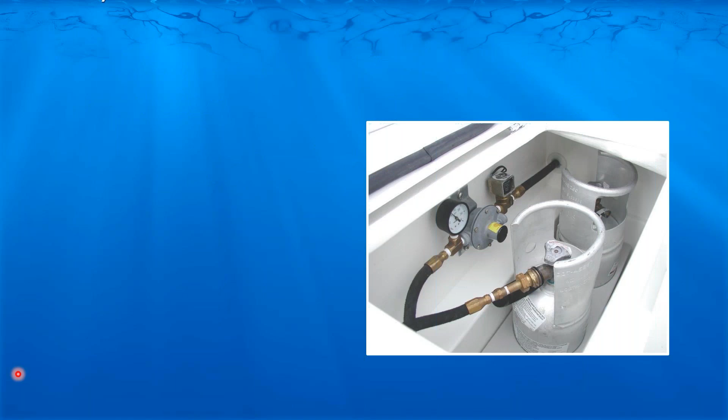All right, so we're looking at a fairly typical installation on what appears to be a pre-made section of a locker intended specifically for the purposes of being a propane locker. And we'll talk specifically about what makes that so, what we need to do in order to have a dedicated locker for our propane system. But in order to have a proper setup, we'll run through these quickly, and then we're going to look at each of them specifically as to their intentions.

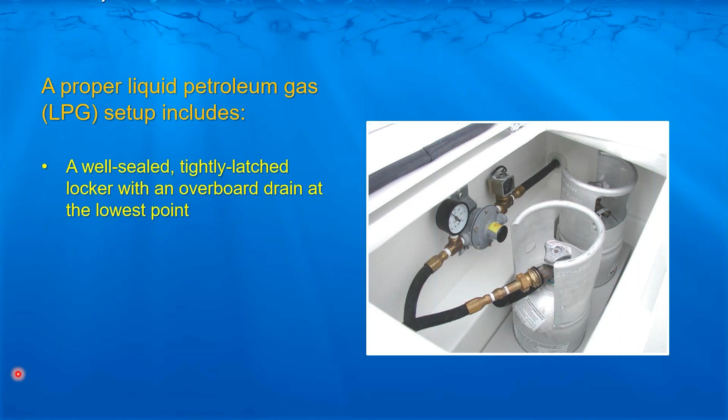Number one, we have to have a very well sealed, tightly latched locker that has an overboard drain. It's a vapor drain, not meant to be a liquid drain, although it will drain liquid if for some reason liquid was to get into that locker. But that is there to drain off any possibly leaked liquid or propane gas that would come out of the system inside the locker. And that drain has to be at the lowest point, of course.

Got to have a pressure regulator, which is this component right here. You have to have a pressure gauge. Pressure gauge is required by ABYC in a liquid propane gas system. You have to have a shutoff valve. In some cases, the valve on the tank suffices. Otherwise, you will need a remotely operated solenoid shutoff valve in the system.

The one big stipulation is that all supply lines between your locker, between the tanks, and whatever components are running off of propane, all of those lines have to originate inside the locker. We do not want lines taken out of the locker and teed off of to feed multiple components. If you need to do that, all of those tees need to be made inside the locker. We want to eliminate the possibility of as many leaks as possible and eliminate all connections as possible outside that locker.

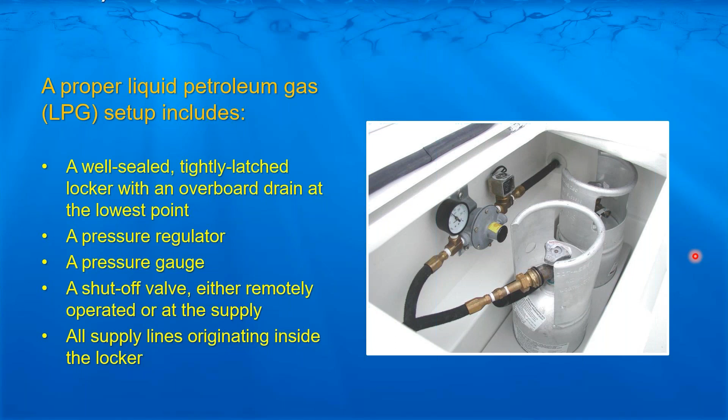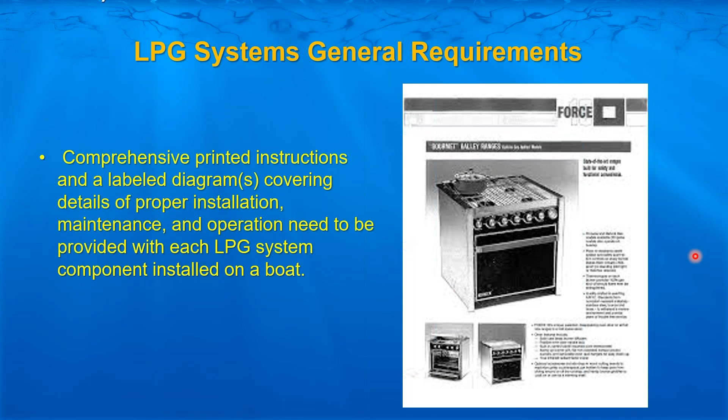It's also required to have a comprehensive instruction book, information supplied with the system, supplied with any components that are installed. That is a standards requirement that information's got to be supplied to the owner or to the boat operator. And we'll look at this specific test later. Those instructions have to state that a test is to be made every time the cylinder supply valve is open for use and after any events that may affect that system.

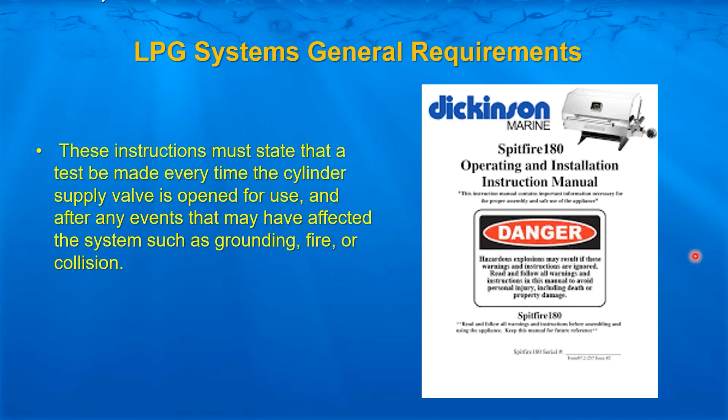We all know that very few people are going to do this, but they have to be provided with that information and understand that that is supposed to be done. Again, we are in a very high liability oriented world, and you're dealing with the possibility of a high liability system. So everybody has to make sure that they cover their butt as far as what should be done. Not that the end user is necessarily going to adhere to that every time.

So we talked about the fact that every system has to be fitted with a pressure gauge, and this is a fairly common setup with the gauge connected to the regulator itself.

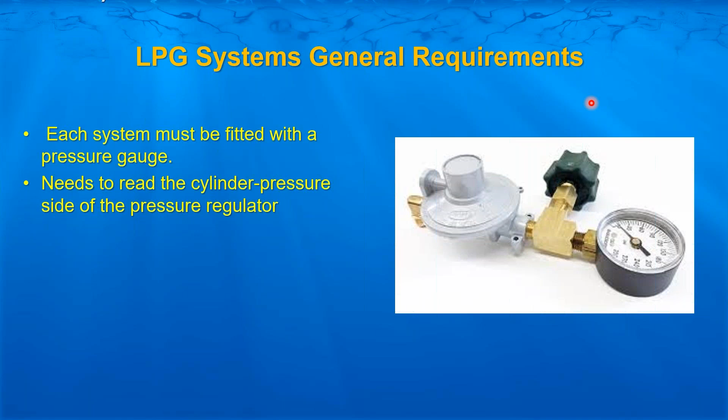That gauge is there to read the cylinder pressure side of the pressure regulator, the high pressure side. The reason it's there is to provide a very easy way to perform a simple test to make sure that the system does not have any leaks, and we'll talk about the specifics of that test a little bit later too.

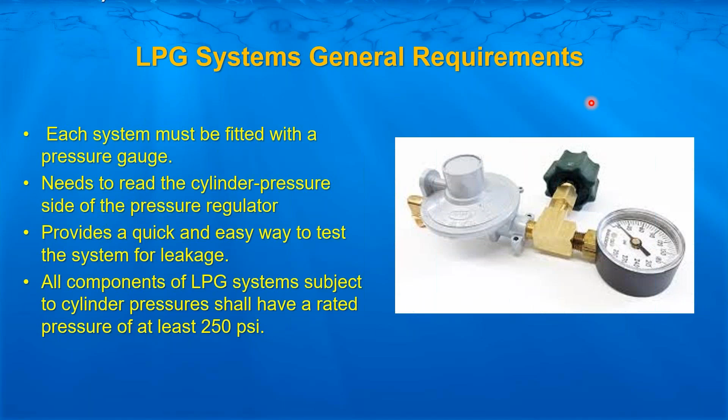You don't see it too much anymore. It has fairly well fallen out of favor. It has to be stored in very large, heavy tanks. It was not very efficient. Didn't last very long. So liquid propane really has taken over as the main player in this genre, this scenario of using gas as a power source.

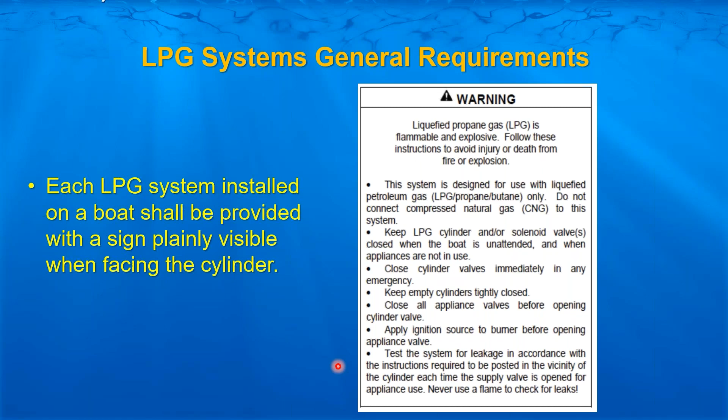On gasoline-powered boats, that sign also has to contain this information, that gasoline vapors are explosive and any open flame appliances can ignite those gasoline vapors, causing death or injury. What that means basically is you don't want anybody operating the stove while you're refueling the boat if you have a gasoline powered boat.

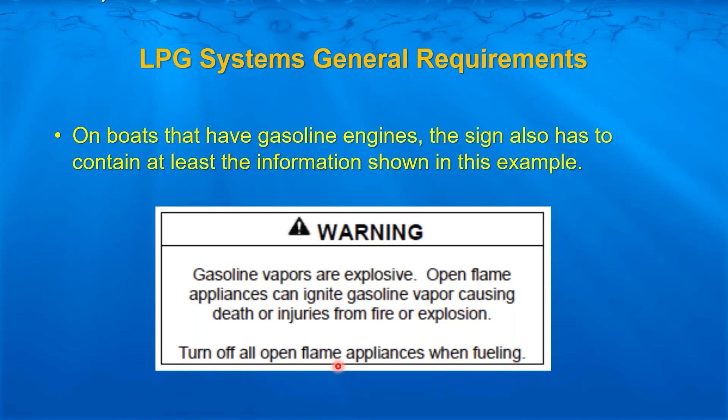All the system components have to be able to operate in an ambient temperature range between 0 and 140 degrees Fahrenheit. And again, if you're using properly rated, usually marine rated appliances and components, they should all fairly standardly meet that and all of these requirements.

Only systems using LPG cylinders of the vapor withdrawal type are permitted. Cylinders that can admit liquefied gas into any part of the system are prohibited. Again, we're not trying to transport or transfer liquefied petroleum gas from one point to another. The only thing we want to admit into that system is the gas at lower pressure.

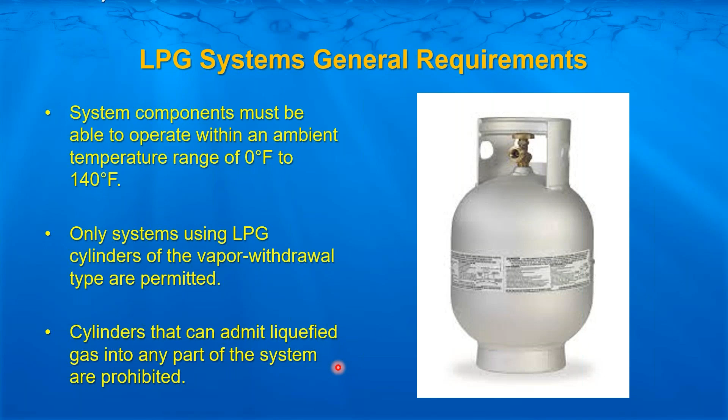There's a couple of Rube Goldberg setups for you there. Components in that system need to be secured properly. We don't want them to move around, mainly because that could put strain on the distribution system, our fuel lines, the propane fuel lines. So needless to say, neither of these scenarios is even remotely proper.

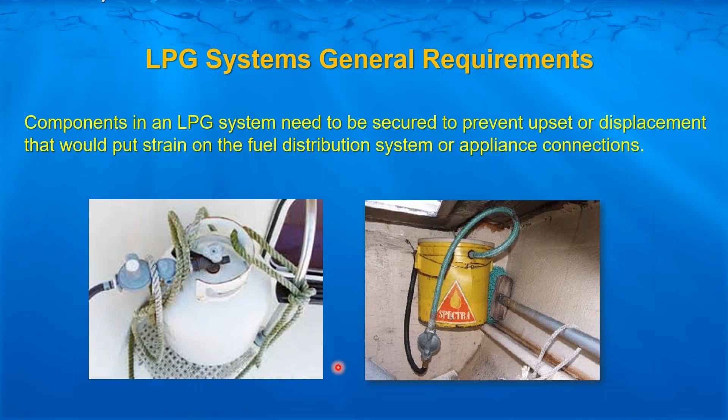Ignition protected equipment. Any of you who have been in the electrical classes understand, when we're dealing with gasoline and in this case propane, anything electrical in the vicinity of those systems has got to be rated to be ignition protected. In this case, for liquid propane, it's required in any compartment containing our liquid propane appliances, cylinders, fittings, valves, or regulators. Now, in most cases, that is just going to be inside the locker. All electrical equipment capable of being a source of ignition needs to be ignition protected and so marked. If it does not say ignition protected on it, do not assume it is ignition protected.

There can be no open flame devices around electrical equipment that's not ignition protected, and around our propane system components, no open flame devices. There can be no exhaust pipes or heat producing devices capable of producing a temperature in excess of 300 degrees Fahrenheit near the components of our LPG system.

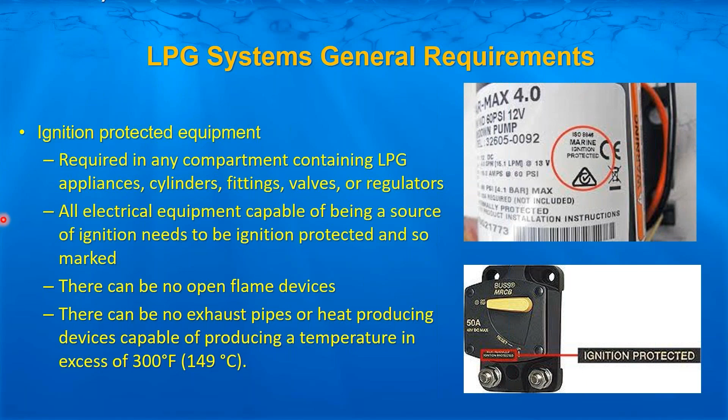Electrical devices in the following compartments do not have to be ignition protected: anything that's in the accommodation space or compartments meeting the definition of open to the atmosphere. That is defined by ABYC as a space having at least 15 square inches of open area per cubic foot of compartment volume exposed to the atmosphere outside the vessel. That is a very specific definition per ABYC that constitutes a compartment that meets that open to the atmosphere declaration.

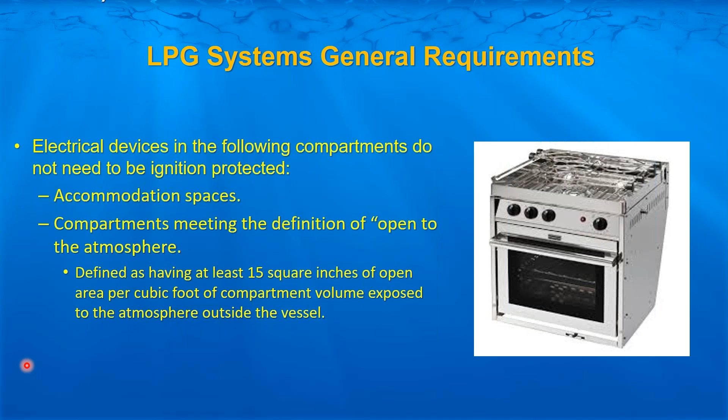But anything that's in an accommodation space, a stove, a heater, whatever else it might be that's running off of propane, if it's in an accommodation space, it in and of itself is not required to be ignition protected. All the cylinders that are used have to be DOT compliant. You should have a DOT number on them, no matter what they're made out

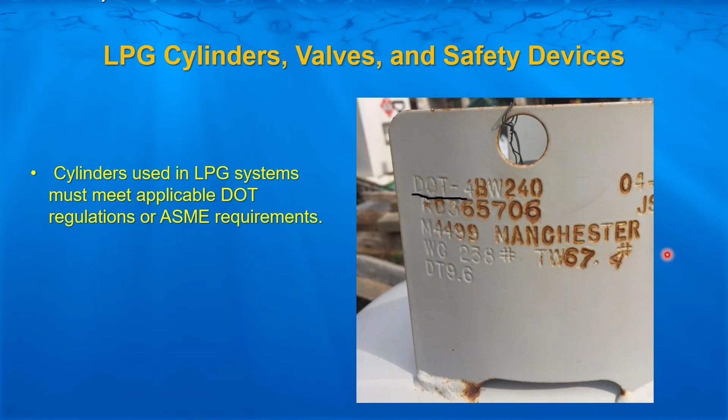of. Every appliance must be fed from a regulated supply line that originates inside the cylinder locker or protective enclosure. So as we discussed, and we'll mention this several times, every connection in the system, except one, which we will see in a minute, is required to be inside this locker. We do not want any joints and connections made outside of that propane locker.

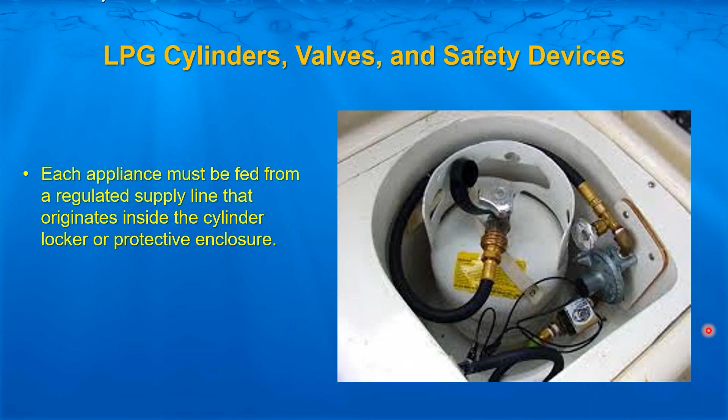There's a requirement to have a readily accessible, either manual or electrically operated shutoff valve installed in the low or high pressure line at the fuel supply. So it's required to have a manual shutoff on the cylinder. And if you have remote appliances, you have to have a solenoid valve, an electrically operated valve in the fuel line. Now it can be before or after the regulator. The regulator is there to reduce the pressure coming out of the tank.

The only thing you have to watch is to make sure you get the properly rated solenoid valve. I have seen installations where somebody puts a low pressure solenoid valve in between the tank and the regulator. It is not going to shut the gas off when you turn the breaker off, turn the switch off. So it is allowed to be on either side of the regulator. Just make sure it is rated either for the high pressure side or the low pressure side.

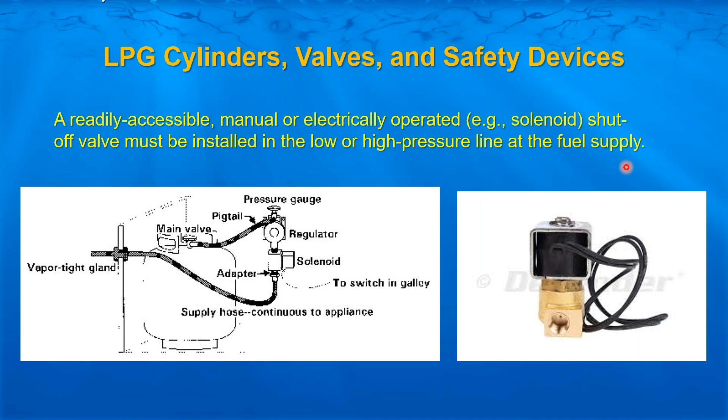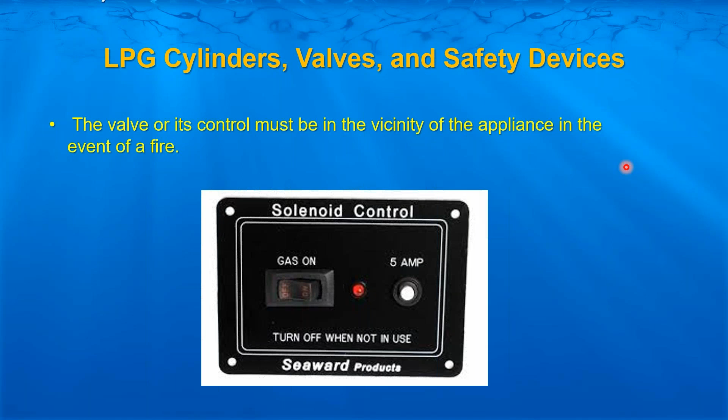The valve or its control must be in the vicinity of the appliance that's being fed in the event of a fire. Fairly typical panel there. If the cylinder shutoff valve is readily accessible from the vicinity of the appliance, the shutoff valve on the supply line is not required. So if the only thing you're feeding with propane is a barbecue on the aft deck or wherever it might be outside, as long as that tank shutoff valve is within a step, readily accessible from the vicinity of that appliance, you don't have to have an electrical shutoff like a solenoid.

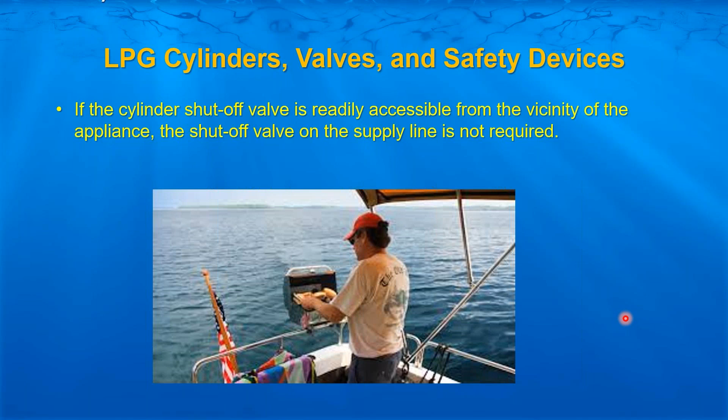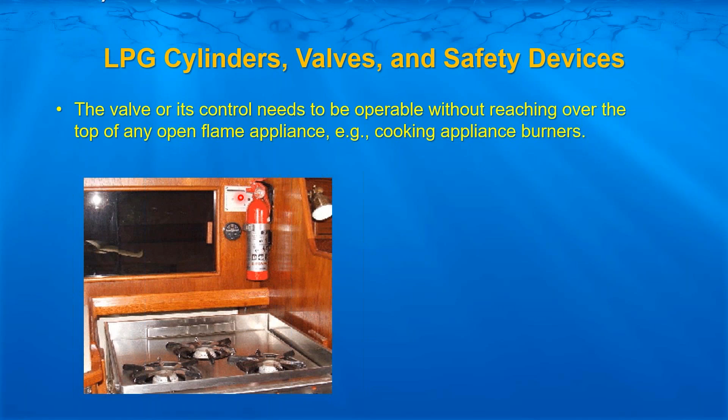The valve or its control needs to be operable without reaching over the top of any flame. Open flamed appliances, mainly cooking appliance burners. What do you think about the location? This is our shutoff for the solenoid. This is our fire extinguisher. How about now? Not a good place for either one of those. So there's actually a standard requirement that that shutoff has got to be operable without reaching over those burners.

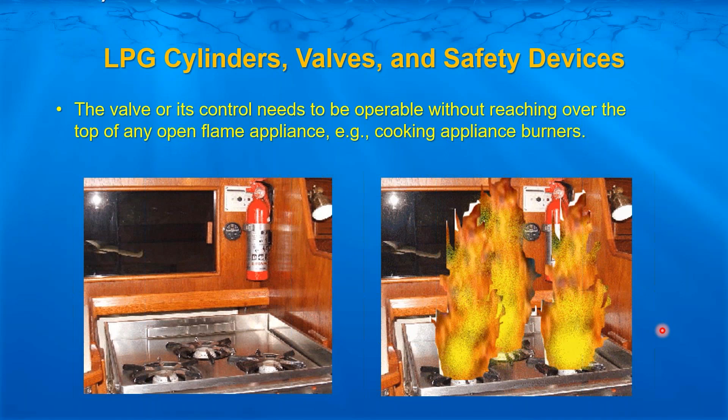In addition to the valve required at the cylinder, if you have a multiple cylinder system, it has to be provided with a shutoff valve or automatic check valve at the cylinder manifold so that each cylinder can be isolated from the other cylinders. Fairly typical. You can buy this assembly as is for a 2-cylinder system.

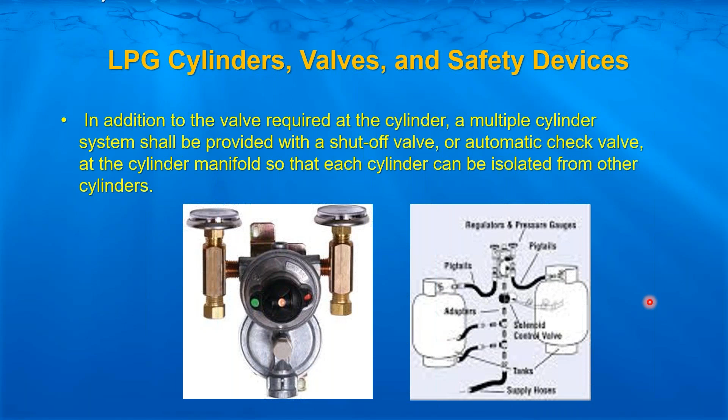Our pressure regulators: every system has got to have a pressure regulator. The pressure coming out of that propane tank is way too high to be used without a regulator, just like you have on your grill at home. It's got a pressure regulator on it. That's what that little round silver thing is, to reduce the pressure coming out of the cylinder.

These regulators have to be specifically designed for use with liquid propane. And they have to be rated to deliver gas under whatever varying appliance loads there are at a pressure not in excess of 14 inches of water column. Water column is a specific measurement of pressure. So 14 inches of water column is the maximum pressure that the gas can be delivered after the regulator.

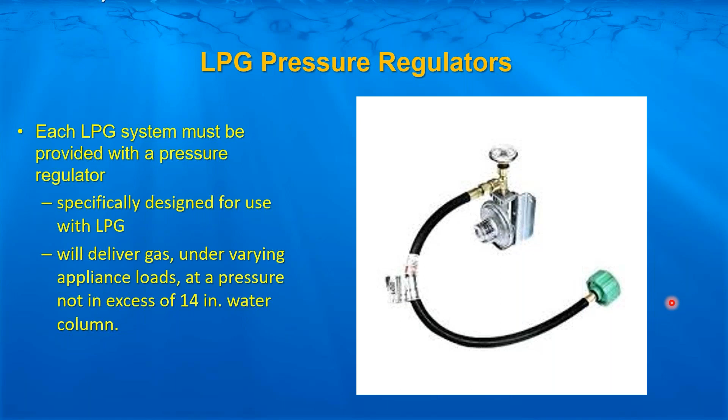It's a picture of a fairly typical regulator, although you don't see too many that actually have this little hose barb connected, and we'll discuss that; this is the relief device. The pressure regulator is required to have a low side pressure relief device integral with the regulator. And we'll see another one of these where it's a little bit different, but this is the pressure relief on the low side, the regulated side of the regulator.

The requirement for that pressure relief is that it will discharge between 2 and 3 times the delivery pressure of the regulator. And again, if you're buying properly marine rated components, they should automatically meet these requirements.

All relief valve outlets shall discharge into the dedicated locker or to the open atmosphere outside the boat. You don't normally see these with an actual hose barb on them where you could vent this out specifically by itself. Normally, it will vent into the locker and then go out the vapor drain that is there to drain off any leaked vapor inside of that locker.

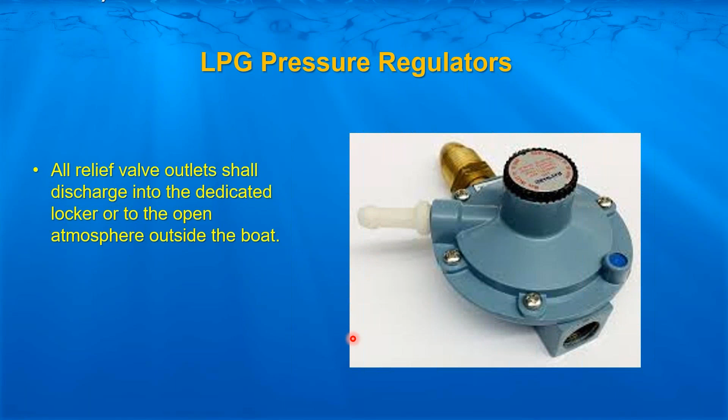Now, if you had a pressure regulator that had that little piece—if you wanted to run a piece of hose from this relief valve discharge through a gland, an airtight gland, through the locker and to a vent fitting on the side of the boat, you're more than welcome to do that too. Seems like a lot of effort to go through, one more hole in the locker you've got to seal up, when allowing it to vent into the locker is perfectly fine. But you can see here, we've got two devices.

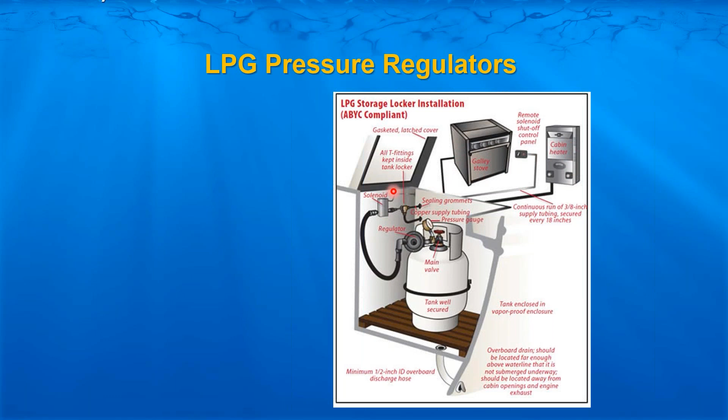There's a little more typical pressure regulator. You can see that little screen there. Again, this is the section that is the relief valve on the low pressure side of that regulator. The regulator is going to reduce the tank pressure to less than 0.5 psi. That goes along with the 14 inches of water column pressure regulation—it's another way to look at it. Another spec is less than 0.5 psi should be the pressure coming out of that regulator.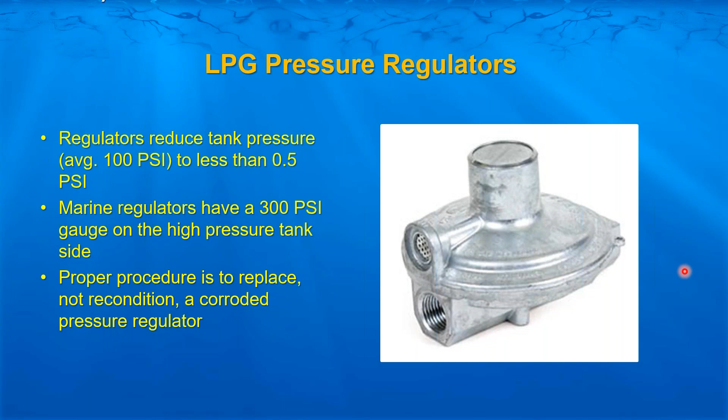Marine regulators have a 300 psi gauge on the high pressure tank side. We already talked about the necessity, the requirement to have that gauge rated to 300 psi. These things are normally made of aluminum, depending on the conditions they're used in—and we'll see where they can be outside, not necessarily in a locker. If you come across one that's extremely corroded, don't try to clean it up, just replace it. That is proper procedure—just replace these things. They're not overly expensive, and it's just not worth the time to try to clean them up.

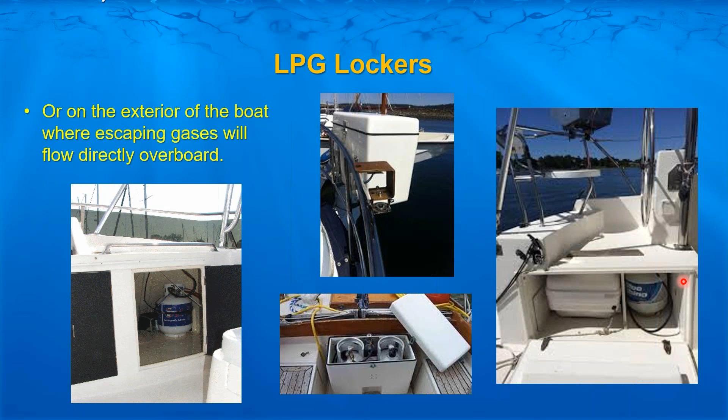All right, the lockers themselves. The requirement is that all of our cylinders are required to be installed in a dedicated locker, or they can be installed on the exterior of the boat where any escaping gases will flow directly overboard. Now, this certainly fits that bill. This seems to fit that bill pretty well. This kind of fits that bill.

You've got a scenario where this locker is going to have a drain, it's going to have an opening on the bottom, and you could possibly have an accumulation of liquid propane gas in the well of the cockpit. If your through-hull scupper drains go down below the water line, there's no way for the gas to drain that way. And on a very still day, you could possibly have an accumulation of propane gas down in that locker well.

This is questionable again as well. It's protected, which again is another requirement. You can't have these things out in the weather, even if they are not in a built-in dedicated locker. If they're on the exterior of the boat, they still have to be. The requirement is that they are protected from the weather. Now, this flybridge covering has drains here, which you can't see from this picture, then it's probably okay. Any escaping gas is going to make its way out.

It's going to stay down along the floor and make its way out through any drains that are in that. But you would certainly need to have some sort of opening at this floor level overboard from this contained area where that tank would be.

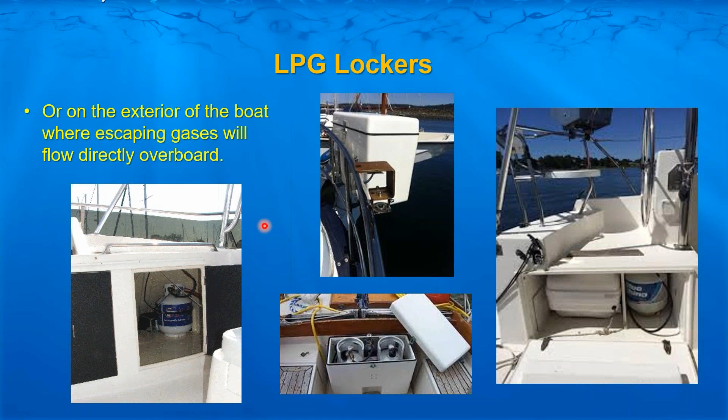Cylinders, valves, regulating equipment, and safety devices are required to be readily accessible, secured for sea conditions, protected from the weather. That is a requirement. Even though you can have propane tanks outside the vessel, mounted outside the vessel, they are not supposed to be out in the weather. They need to be protected from mechanical damage.

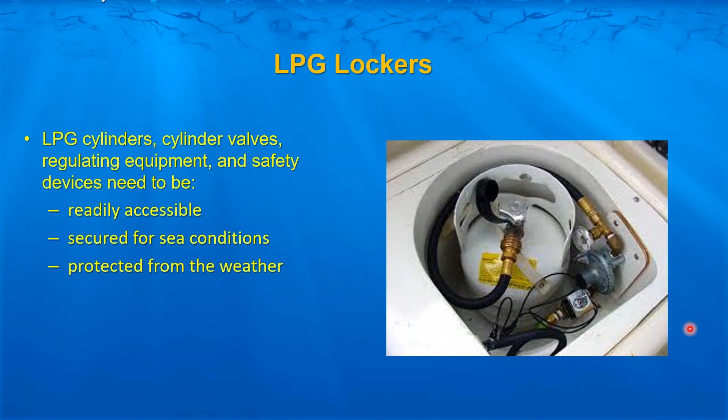The storage requirements for either unconnected reserve cylinders or empty cylinders is exactly the same as cylinders in use. They've got to be inside that dedicated locker. You see a lot of small boats that have rail-mounted propane that takes the little screw-on green canisters, and the green canisters end up in a drawer or in a compartment down below. They do not belong there. If you have any propane on board, it is not to be stored in the cabin, and it's not to be stored in any place where, if it were to leak, gas could make its way into the bilge or into an occupied space.

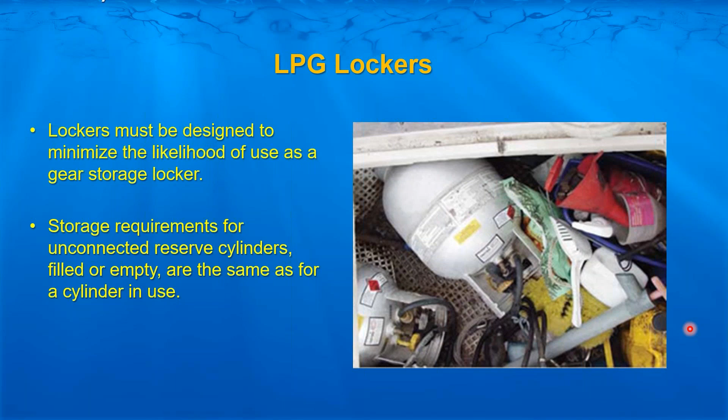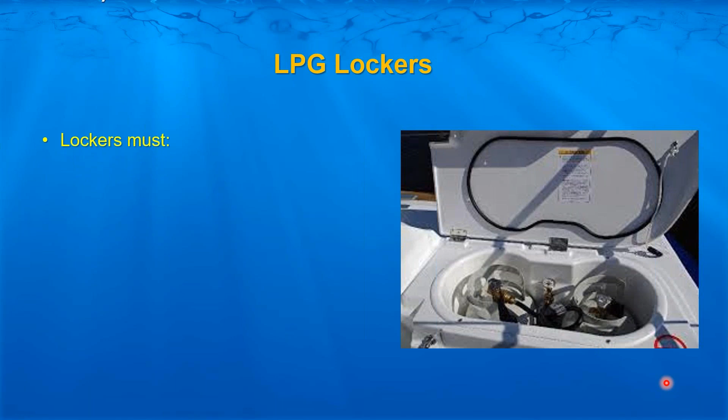The lockers themselves are required to be vapor tight to the hull interior, located above the waterline. That's a very difficult requirement to fulfill when you're retrofitting an aftermarket locker, a locker that goes inside of another locker, and we'll see a picture of that here in just a second. They've got to be constructed of or lined with corrosion-resistant materials.

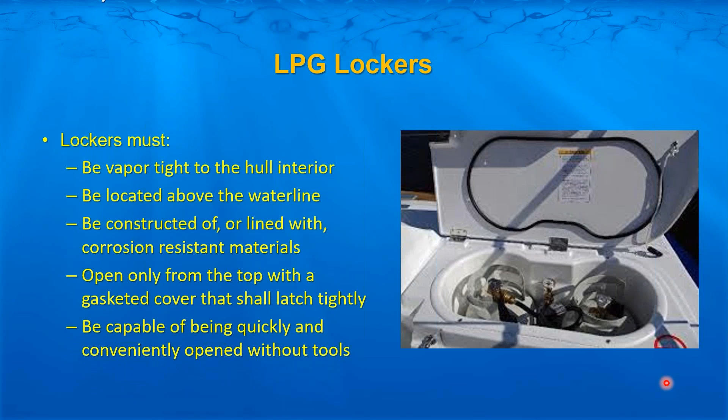They are to open only from the top with a securely latching, gasketed, covered top. They must be capable of being quickly and conveniently opened without tools. The requirement is for a built-in locker that it opens directly to the outside atmosphere. We don't want anything precluding access. We want this thing to be completely open to the atmosphere when the access, whatever that access is, whenever the lid is open.

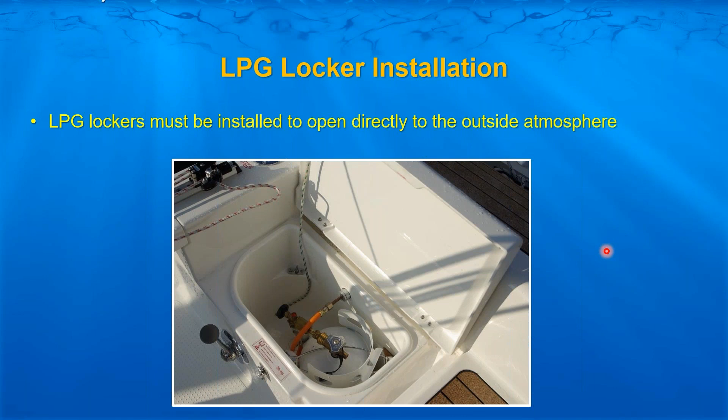There is one of the aftermarket type lockers. If one of these lockers is installed inside a boat locker, inside a lazarette, wherever it might be, the locker is required to be located as high and as close as possible to that boat locker's opening. We don't want this thing stuffed down under this corner over here. It's got to be right out in the open so that when you open the lid to that locker, it is open to the atmosphere, as it would be if this was a built-in scenario.

A lot of older sailboats did not come with a built-in propane locker. People want to install these standalone lockers, and they're very nice—they meet the requirements, the ones that I've dealt with. But in a lot of scenarios, it's difficult to get this in a locker and still have fall from the bottom of the locker to an overboard drain fitting downhill, being above the waterline. That's one of the most difficult parameters to meet when installing one of these lockers on an older vessel.

Most older vessels have a fairly low cockpit, low coaming, and low lazarette or seat lockers relative to the waterline. There's just not a lot of space to get that locker in underneath the lazarette locker lid and still have space between the bottom of the locker and somewhere overboard to run a hose downhill to the overboard fitting.

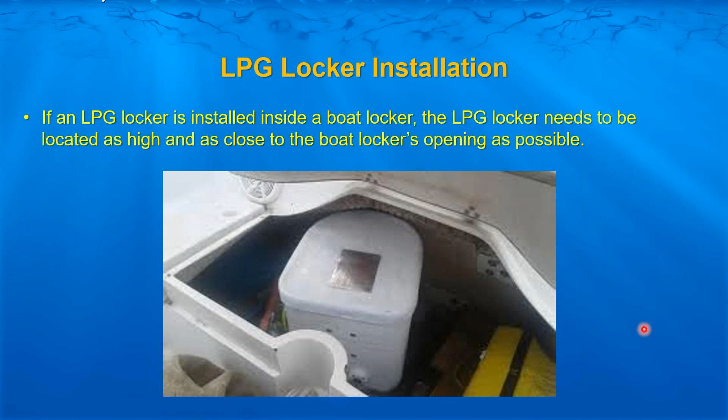Without being below the waterline, which it has to be above. When access to the equipment is needed and the locker's open, the cylinder valves must be capable of being conveniently and quickly operated. System pressure gauge dials need to be fully visible right there—you open that locker, you need to be able to see that gauge.

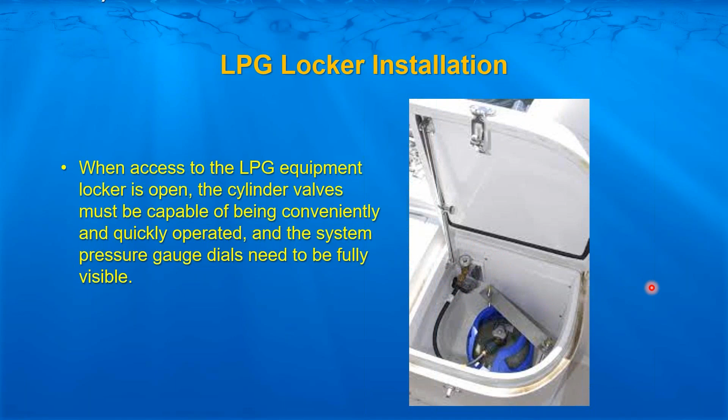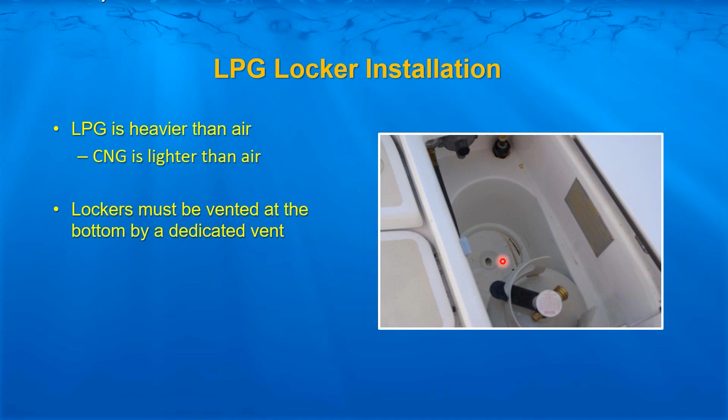As we discussed, liquid propane gas is heavier than air, where CNG is lighter than air. Therefore, we've got to have a vent, a locker drain vent, in the bottommost portion of that locker. That's not there for water—if this thing is gasketed correctly, you're not going to get water in that compartment. It is there to drain off any liquid propane gas that might leak out of the system inside that locker.

Again, the minimum diameter of any component in that drain vent can be no less than half an inch inside diameter. It's not the hose size—it's the minimum diameter of any component in that vent system, which would be the fittings. It's 3/4 inch hose most of the time.

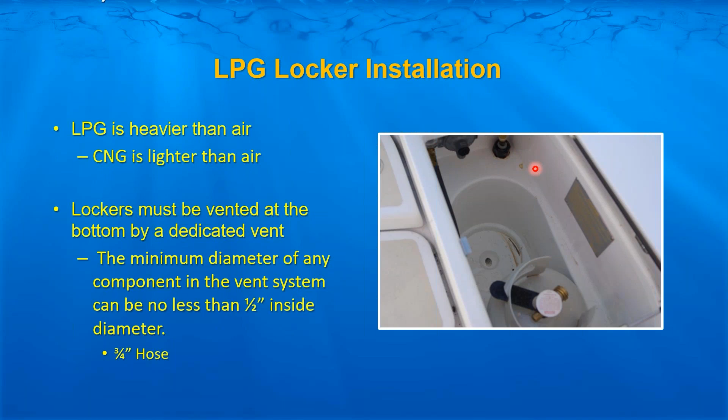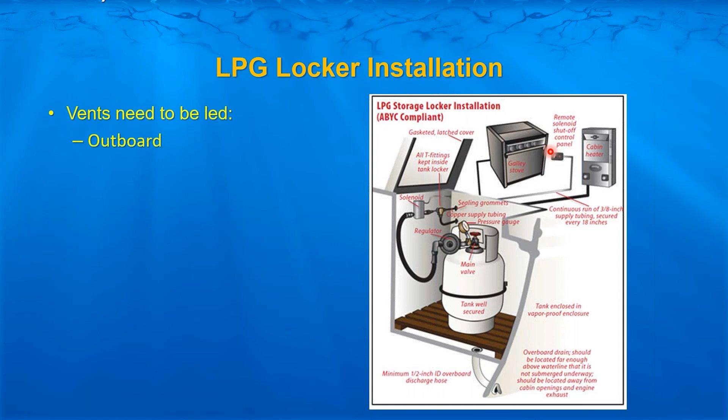There's our same picture again. Our vents, same stipulation, need to be led outboard without pockets through the hull to a point lower than the locker bottom, above the waterline with the boat in a static floating position, and at least 20 inches from any hull opening to the boat interior.

Now, even this one here—above the waterline with the boat in a static floating position—I installed one of these one time, and it absolutely met that criteria. But it was on an older sailboat, and anybody who deals with sailboats regularly knows that especially when you motor, the boat squats. So where the waterline was here when the boat was sitting still, the locker was above the waterline perfectly fine.

With this being right at the transom, when the boat was running, the waterline was up here, which means water filled that well to about that level. So it wasn't the best scenario in the world. It did drain out again, mostly fully, but that's going to cause a lot of corrosion issues inside—with the tank itself, with all our electrical and plumbing connections. It's just not a good scenario. So in most cases, that locker needs to be above the waterline even when the boat is running in motion.

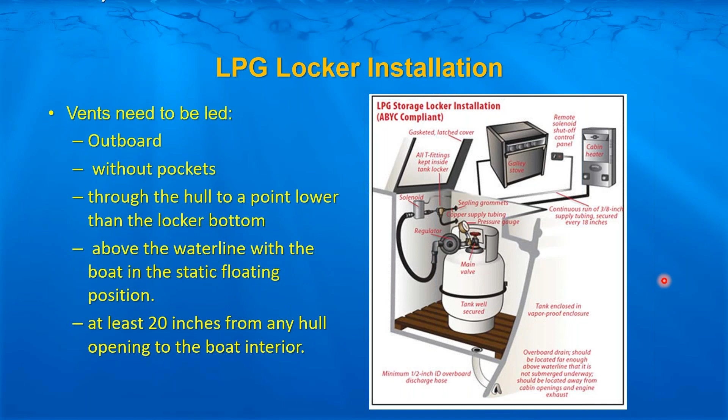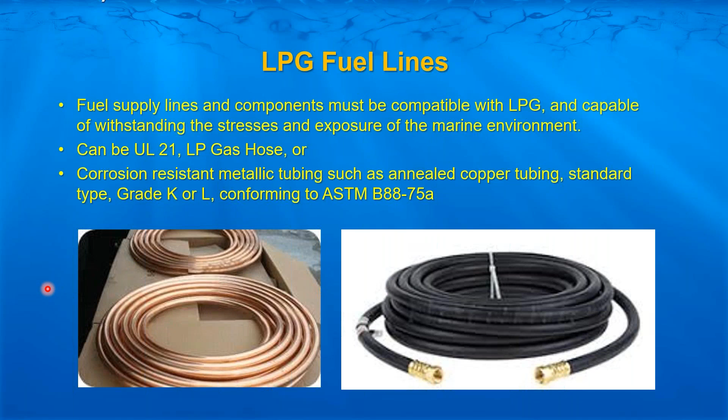Our fuel lines, pretty simple—they've got to be compatible with liquid propane, capable of withstanding the stresses and exposure of the marine environment. They can be either UL21 liquid propane gas hose, which we're looking at on this side, or corrosion-resistant metallic tubing, such as annealed copper tubing, standard grade K or L, which is very typical, especially in older boats, to find propane systems plumbed with copper tubing.

The lines—flexible lines have to be equipped with permanently attached end fittings, either a swage sleeve or a sleeve and threaded insert. There are no hose clamps at connections in liquid propane gas systems. No hose clamps, period. Nowhere. Doesn't work.

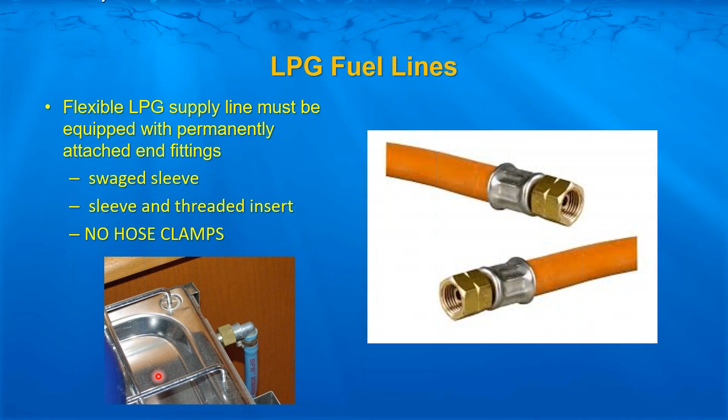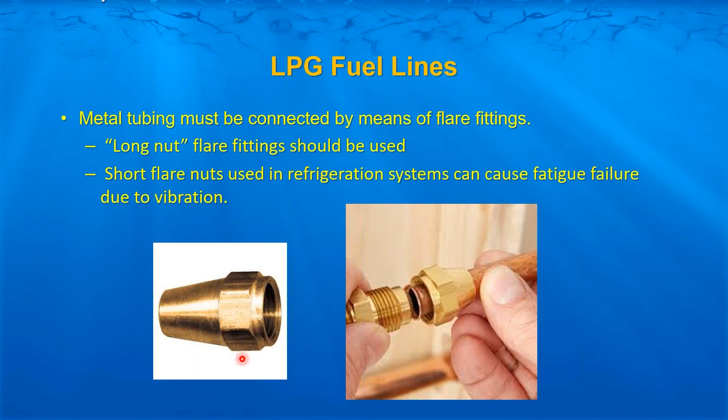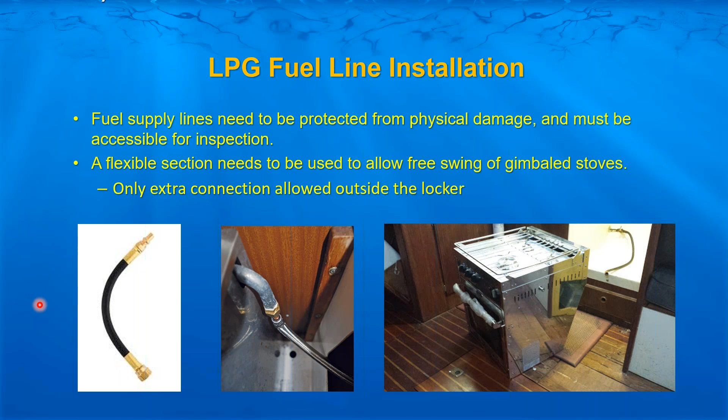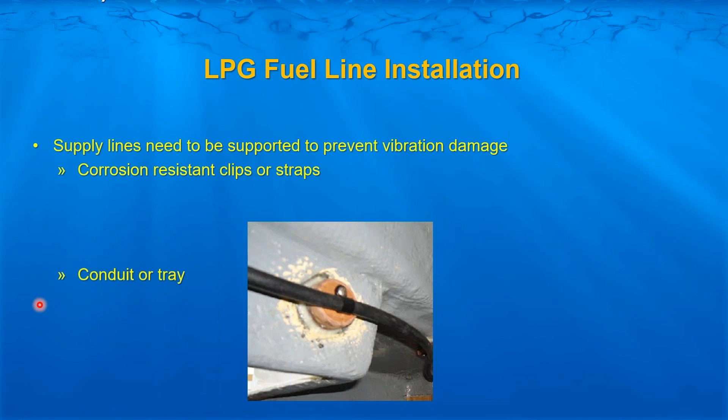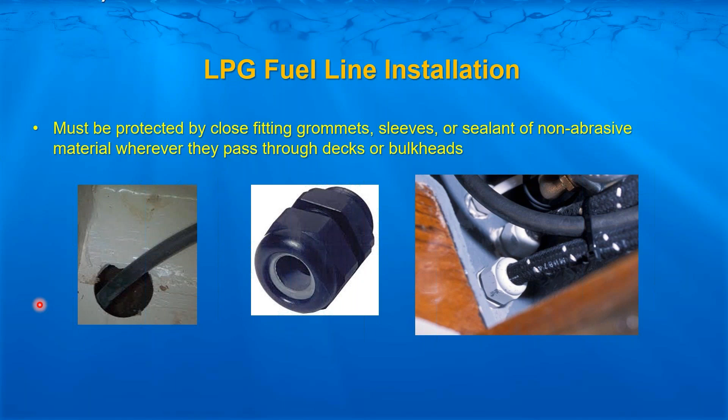You've got to support our fuel lines to prevent vibration damage, chafing, with corrosion-resistant clips or straps, or they can be run in a conduit or in a tray. Again, when we pass through the wall of the locker, through any bulkheads, our lines need to be protected by close-fitting grommets, sleeves, or sealant of non-abrasive material wherever they pass through those things. And of course, they've got to be vapor tight going through the wall of the locker itself.

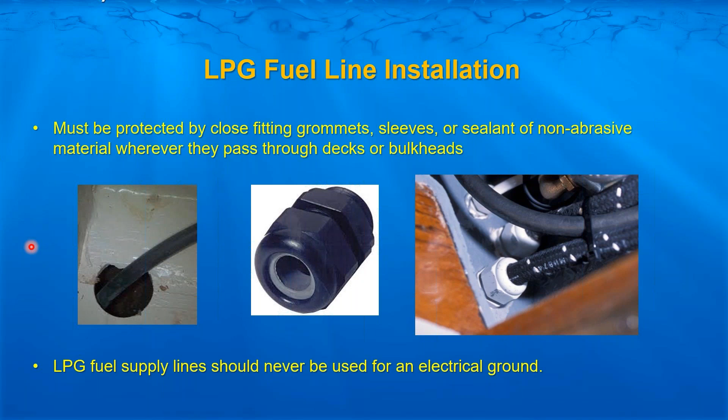We never want to use our copper LPG fuel supply lines as an electrical ground. Seems pretty obvious, but sometimes you got to state the obvious.

So once we have our new component or new system installed, testing is a big deal. Again, high liability situation. If something is not right, if it is not tested properly, and an accident occurs, there's going to be big trouble. So anytime you deal with a propane system, make sure don't take any shortcuts in checking, testing the entire system, checking all connections and things of that nature.

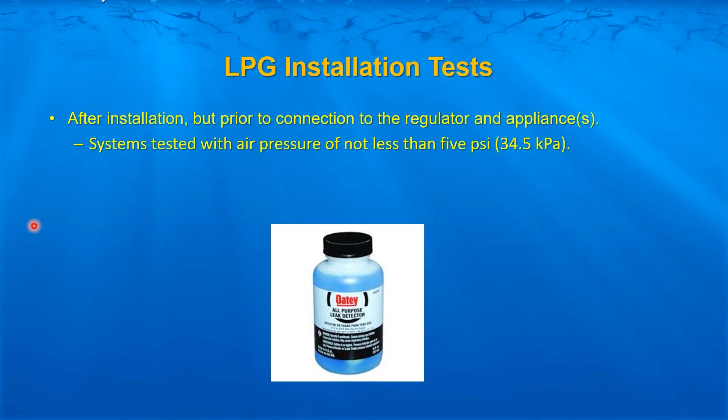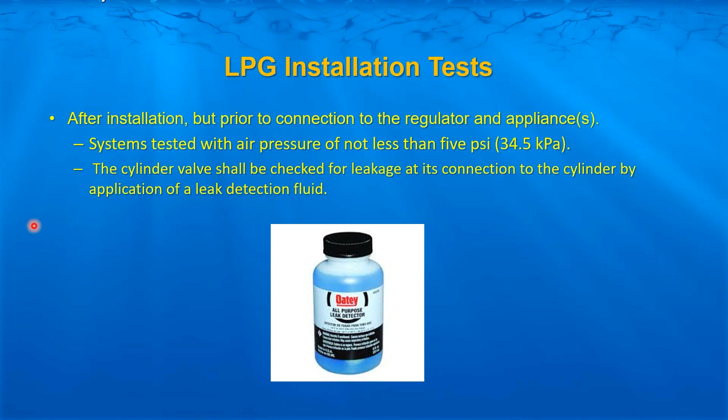So per ABYC, after installation of an entire system or new component, but prior to connection to the regulator or the appliance, we need to test that system with an air pressure of not less than 5 psi. After that, the cylinder valve should be checked for leakage at its connection to the cylinder by application of a leak detection fluid.

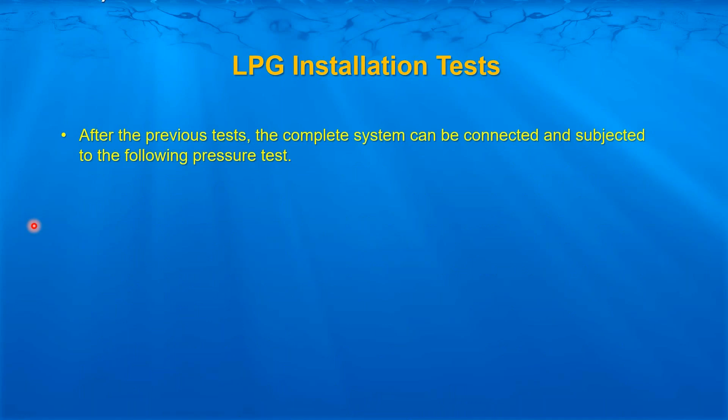After we perform those tests, the complete system can be connected subject to the following pressure test. With the appliance off, the stove, the heater, whatever it might be turned off, we want to open the cylinder valve to pressurize the system, put pressure in the system. Then close the cylinder supply valve. You want to observe the gauge reading. We don't want to see any drop in pressure in less than 3 minutes. Personally, I would want to see it for a whole lot longer than 3 minutes, but that is the specifics by the standards, that the pressure should remain constant for not less than 3 minutes.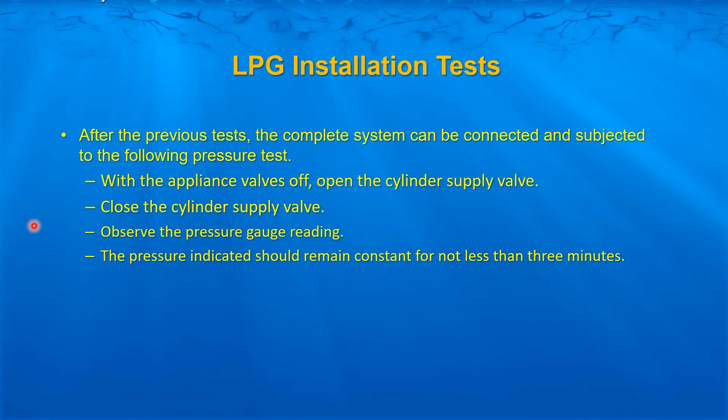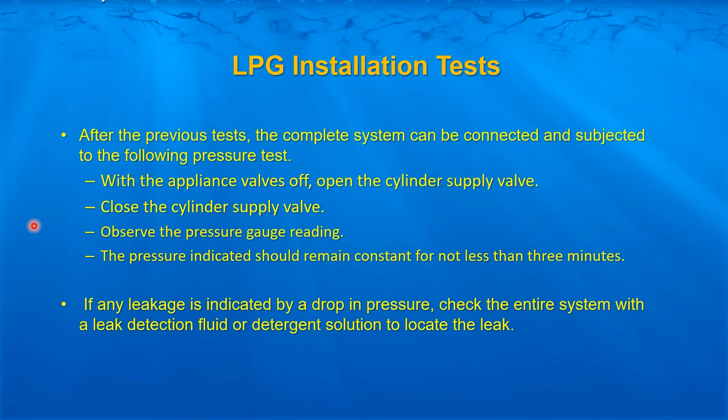Again, if you find any leakage, drop in pressure, you've got to leak check the entire system again, with detection fluid, detergent is fine. The only thing you have to watch out for using detergents is that they sometimes contain ammonia. You never want to use any detergent, any solution for leak checking on copper that contains ammonia. It will and can attack brass fittings in a very short order. Those fittings can develop cracks and fail, whereas initially when you made your test, there was no leak there.

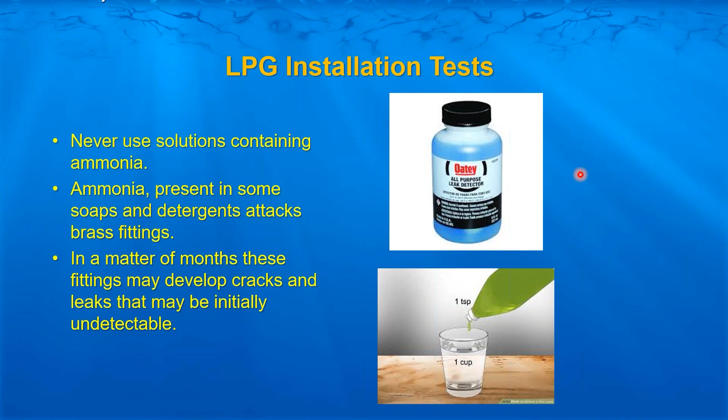So if you use a leak detector, in most cases it is not going to have ammonia in it, so you really don't have to worry about that if you are dealing with using some sort of detergent solution to do your leak testing on these systems. And finally, never use a flame to check for leaks. Again, one of those things that just needs to be said. Great picture, eh?

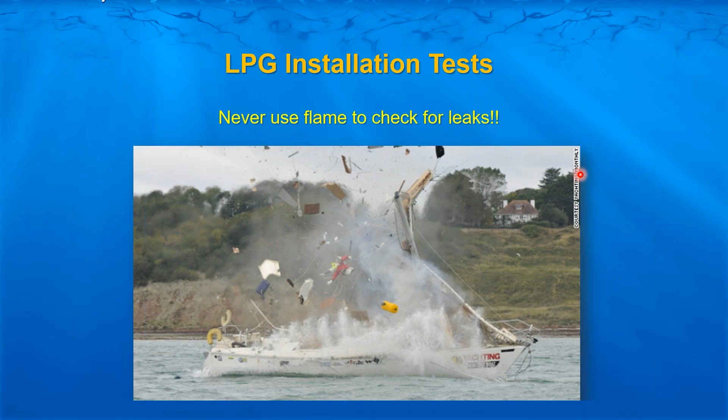So in reference to the 1 pound tanks, if you don't have a storage locker, where would you store those tanks? If you are going to have propane on board, you've got to have a dedicated locker to store the tank. In that case, you may be looking at putting in one of those small standalone lockers if it can be installed properly. But the only other place to put it would be if you had a small locker on deck, where again, if it can't be out, it's got to be enclosed to some extent, but whereby if there was a leak, it would have a small vent opening that it would leave that locker and drain overboard essentially.

If you have a propane locker on the flybridge, do you have to have a drain hose run down to the water line so that the fumes flow overboard and not into the cabin below? That would be extremely, yes, extremely, extremely suggested, correct.

CNG is becoming harder to obtain. Please discuss conversion from CNG to propane. What needs to be changed? There's an issue of CNG locker shape being different from propane.